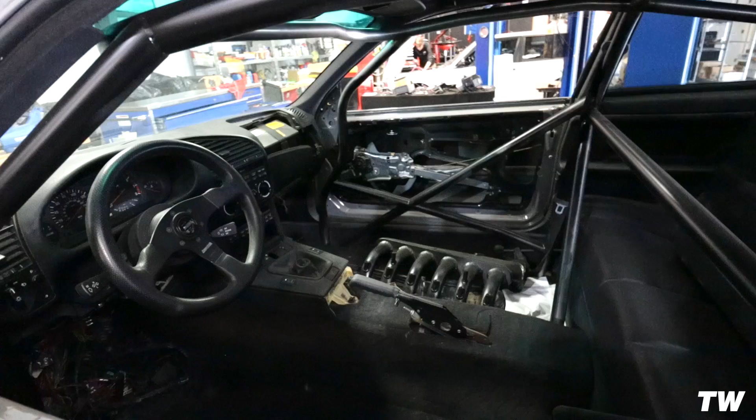In this video, I want to help people decide whether MHD is for them or whether bootmod3 is for them. But like I said, I think you're gonna be able to get to where you wanna be, or very close to it, under both of the platforms. In my opinion, I think bootmod3 is a little more conservative, where I feel like MHD is a little more aggressive when it comes to the tuning. So I think we'll probably see some higher numbers.

Ooh, she do rip through gears though.

Okay, just pulled into the shop. We're gonna get into this process of tuning. I think what's gonna happen today is we are gonna flash in MHD. I'm gonna show you guys that process, kind of explain the differences between MHD and bootmod3 off the bat, and then we're gonna hop over to the dyno and lay down some new numbers.

I'm thinking a couple of maps, probably gonna use the OTS pump map, and then I think we're gonna do some form of E-blend map, might be a custom map. Like I said, John and MHD have been making all the maps for the Supra here at his shop, so he has them all. Basically, if I go pure or do anything like that, I can just literally flash in the map that he has and I'm good to go. Same when it comes to adding in meth and all that stuff.

So a lot of you guys are probably anticipating the meth video. Why haven't I tuned for meth? We're gonna be making some changes to the way that the meth kit is installed on my car. I only have one jet right now, and we're thinking of changing out the lines to stainless steel because we want to be able to tune the car with methanol, but using M1 rather than using the 50/50 boost juice.

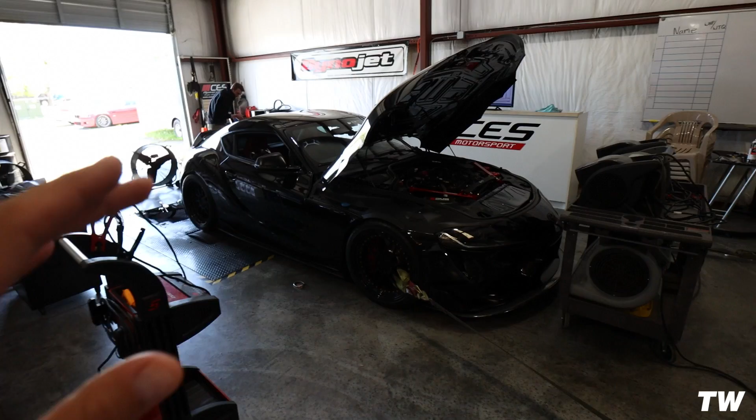All right, we're letting her cool down here a little bit. We're gonna flash in the maps right away, and then I'm gonna show you guys a little bit of the flashing process, kind of what the interface looks like in comparison to bootmod3. And then from there, we will just go directly into dynoing the maps.

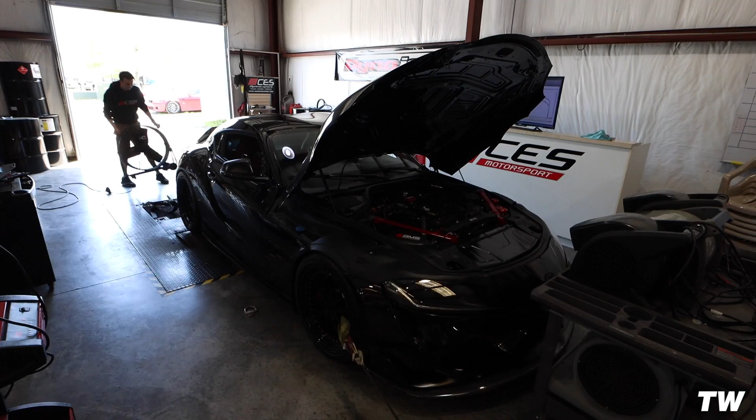So it's going to be 2 maps: the pump map, and then the E30 map. I believe that's what we're doing - it's either E50 or E30. The E30 map is going to be a custom map made by MHD for the Supra, one of the maps that John and MHD worked on together.

Just to be very clear, this isn't a diss to any of my previous tuners. I still think bootmod3 is a great platform. I still think Payne, F80 Paul, Kerry Jordan are all fantastic tuners under bootmod3 if that's what you want to do, or EcuTech, whatever you want to do.

This video is primarily so I can learn about MHD and accurately, unbiasedly give people my opinions when they ask me about both platforms. There really hasn't been that much content comparing MHD and bootmod3 from someone who's actually done it on a Supra. Most people putting out numbers and tune videos just stick to one, which I've done - bootmod3 my whole life. I really want another perspective. I think it's good content, informative for you guys, and brings some value.

Anyways, let's get into the flashing process.

So basically you have your main buttons down here and your back button there. This is obviously the main screen. When you're ready to flash your map, you hit MHD map and it pulls up your maps. Stage 0 is obviously stock, but MHD actually remains installed on the car. Then stage 1 and stage 2 are for the various upgrades you have on the car, and your octane based on what you want to run.

Guys, I want to point out one of the differences I noticed right off the bat: with bootmod3, it actually creates a new map for every single octane and every single stage, so you end up with pages of maps. This makes way more sense to me - just having a little tab here where you select the octane. It's those little details that, in my opinion, make such a big difference when it comes to your user experience.

John brought up a good point. When you are flashing this in, make sure you do not touch anything on the car, even the doors, leave them open. Don't mess with windows, don't mess with anything. And we did go ahead and throw on a battery charger just in case.

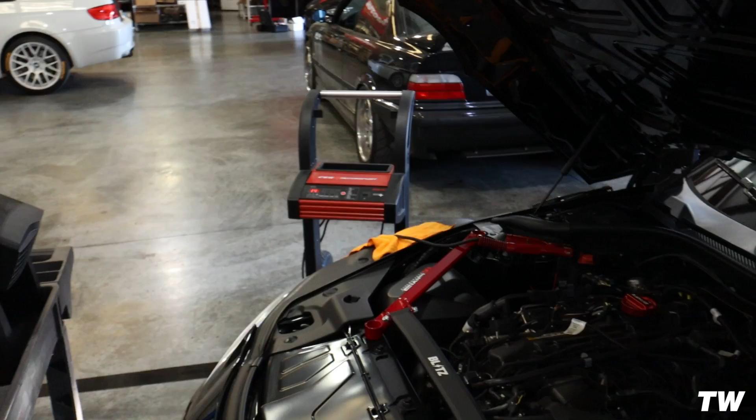You can already see that even though it said 9 to 20 minutes for this, it's less than a minute. Pretty fast. I've seen you flash in other cars before that were already flashed and switching maps, and it's like lightning. At the end of the day, those kind of things actually do make a big difference. When you're constantly switching between maps 2, 3, 4 times per week, that becomes kind of a big deal. Even when you're tuning and doing adjustments, being able to flash quickly to put a new map in and do another dyno test helps tremendously. It used to have to wait 2-3 minutes at a time just to flash in a new update, where now it's seconds.

You had one of the first Supras here in the shop, and you guys were developing maps with MHD. Well, I have to give a little bit of credit to Jake Yamona. He's actually working with the MHD guys. He reached out to us specifically and said, hey, I heard you might be picking up the Supra, we'd like to work with you to start developing some tunes. Of course, we were super happy about that. So when we did get the shop Supra, we immediately brought it to the shop and they began testing on the shop car. We were able to successfully flash the ECU and immediately begin tuning.

That's kind of how it all began, over a year ago with the MHD guys, and I got to know Marshall and Momir, and Fabian at Pure Boost, who does a lot of the custom tuning we do here, and the rest is kind of history. We've been developing ever since. I think some of the OTS stuff they have available out there was developed right here, and hopefully it's been doing well for a lot of other customers and we're continuing to develop more stuff.

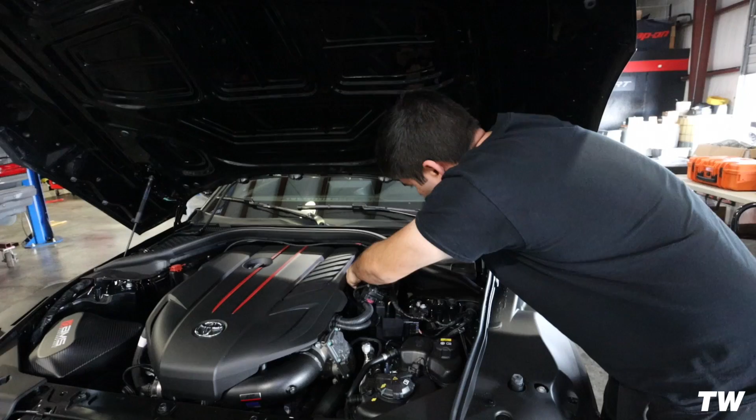I also want to remind you guys, we actually did the unlock here when we initially did bootmod3, and we did it with Active, so they were able to unlock my car because it needed a bench unlock, my Supra. I know there's a lot of Supra guys out there that need bench unlocks. So if you're wondering if you can do a bench unlock for bootmod3 and then use it under MHD, you can. You don't need to relock and then re-unlock, you can just flash right into MHD. It's really that simple. The important thing is, if you do flash, make sure you don't flash back to stock and relock the DME when you do that.

Always leave it unlocked, because if you do the relock, then you'll have to do the bench unlock over again. So definitely do not relock the DME if you do flash back to stock before you switch platforms. I think if you're trying to go to EcuTech though, it's a different story. You'll have to relock and then re-unlock. For me personally, that's why I'm not going to EcuTech. Being able to just flip over to MHD is as easy as coming here and doing it.

And if you guys are interested in unlocking, they have the service. You can just walk in and bring your car here, and they can do that for you here, which is huge. Not a lot of people are doing that in the area. So just make sure it's not after June of 2020. They created a new lock after that, and there still is no unlock for ECUs that are programmed after that date. RIP the majority of A91 owners.

Correct. Unfortunately. Who knows how long it's going to take? I mean, that's like one of the big questions. I'm really surprised that they haven't already cracked it, because people are kind of like freaking out. Like, what am I going to do? I bought this car to tune it. We've had a lot of people asking too, and we're like, we can't do it until that's been unlocked.

That's a huge bummer. We're going to dyno the car and put down the numbers that we have on the 93 Octane Stage 2 MHD OTS map. And then we're going to compare them with the previous numbers we did under bootmod3, so you guys can really see the difference in the graphs and everything. So it should be good. Let's get into it.

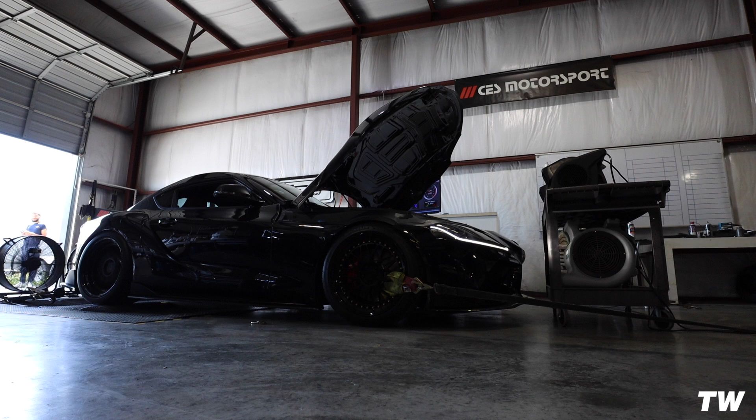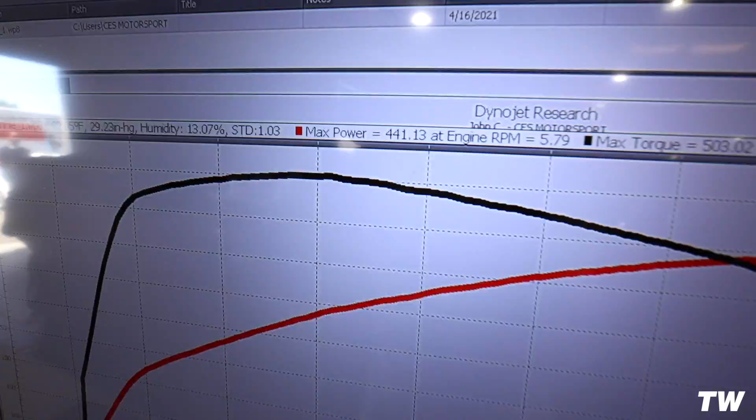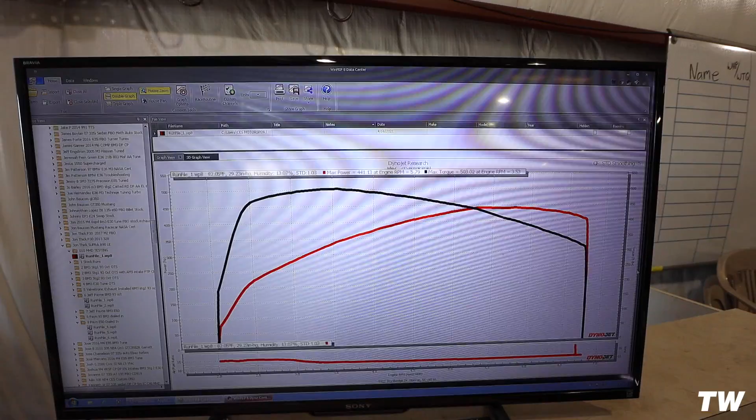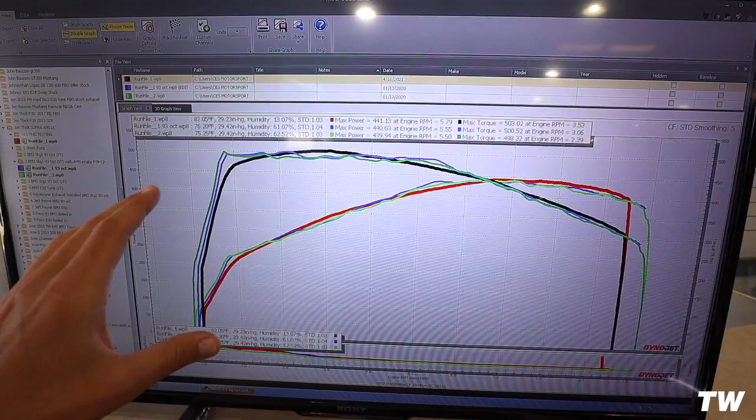All right, so first run with MHD. So here we are already at 441 wheel horsepower, 503 torque, 93 pump, OTS, not a custom tune, just right out of the gate. Not too bad. That's great. All right, so to show you guys what we have here, the black and the red are going to be the MHD numbers. The other colors that you see, the blue and the green, those are bootmod3 OTS numbers. And what I want you guys to pay attention to is how clean the red and the black is compared to the blue and the green.

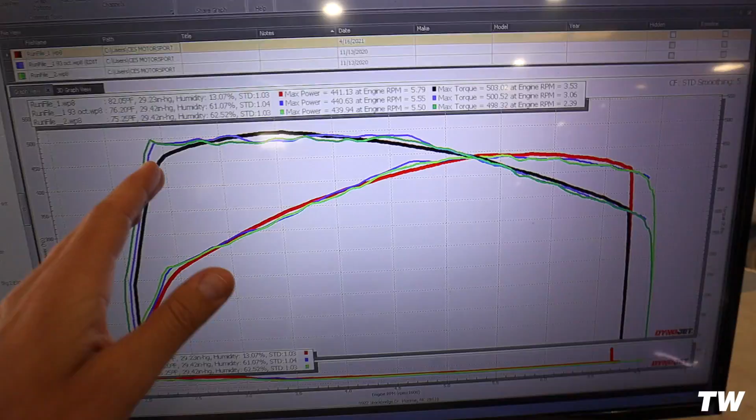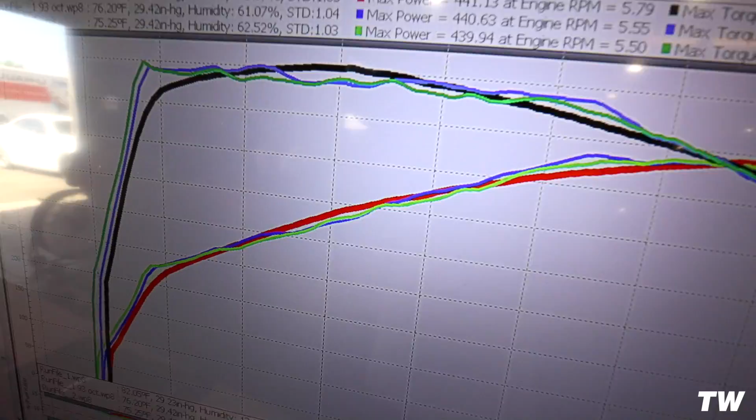So if you guys remember, I had a video where I was talking about how I just can't drive on this bootmod3 OTS tune. You can see it right here. You can literally see what is happening in that tune. It's just squiggly, it's all over the place. That is exactly what I'm feeling when I drive it. So if you look at the MHD, just look at how clean that graph is. It's super smooth. As far as numbers go, first pull, 441, 503, really, really good numbers.

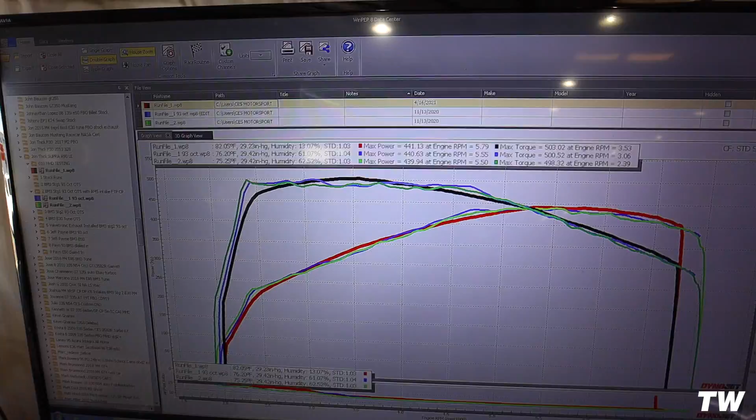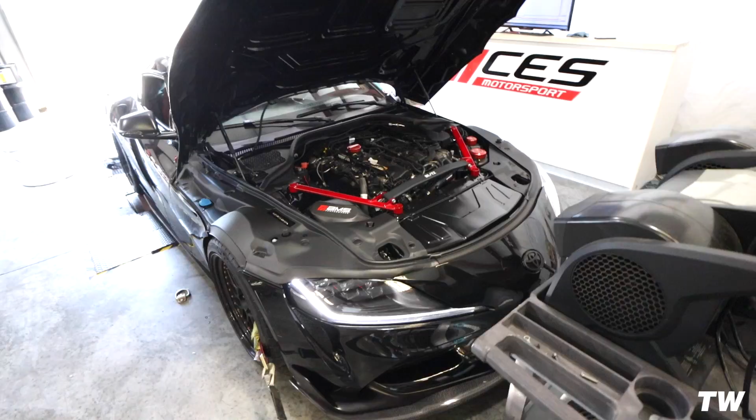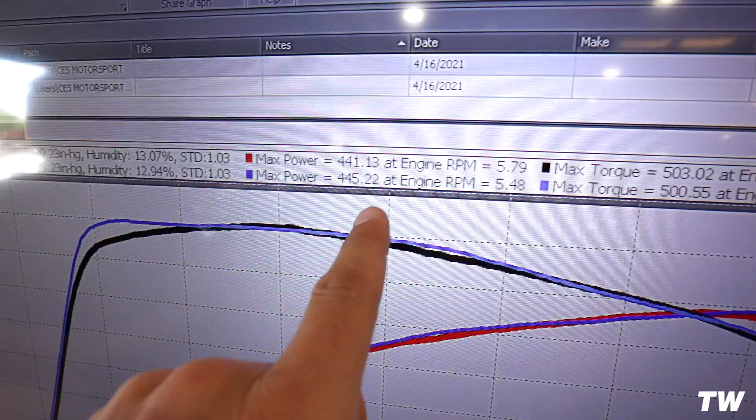I think we're gonna try one more on this map, but as far as talking to John, it seems like that's probably where we're going to end up. So we don't need to go too crazy on that. Yeah, let's go ahead and give it one more run, see where we're at, and then we'll move into E30. Dude, I'm loving how clean these graphs look. Man, look at that. So we got 441 on the first one at 503. The second one gave us 445 at 500. Super consistent. So we know that that's where we need to be.

But just look at how clean these are. We've done a lot of work on these, and MHD definitely has refined these since we've been working on them as well. And these are 82-degree ambient temps also, so it's not like we're 40, 50 degrees out here. This is normal operating temps on the dyno and still getting these, and this was not a cooldown. This was just 2 back-to-back passes on the dyno, and those are the numbers.

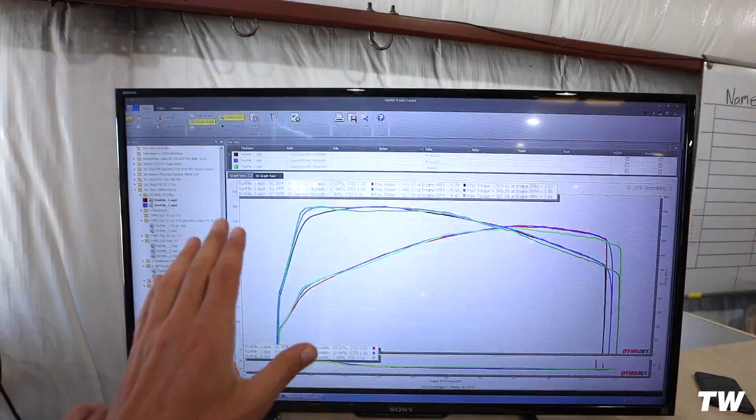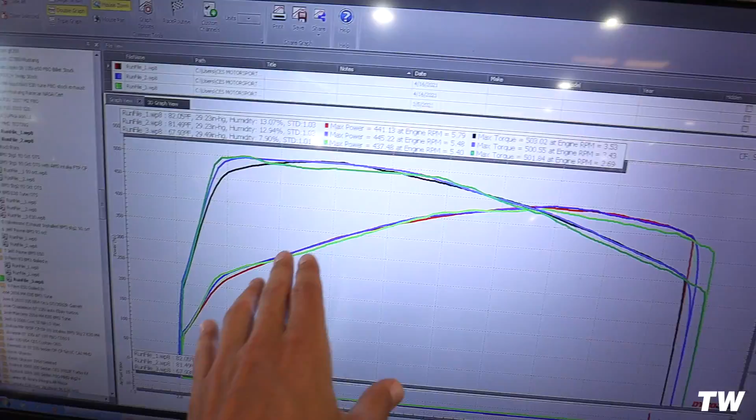Also, let me add this in there because I know you guys are going to ask about this as well. We wanted to throw up the paid tune so we can compare the paid tune. Now, the paid tune made the boost mode platform work much better with these graphs. I mean, you can see clearly it's much cleaner. He's the green, by the way. Paid is green.

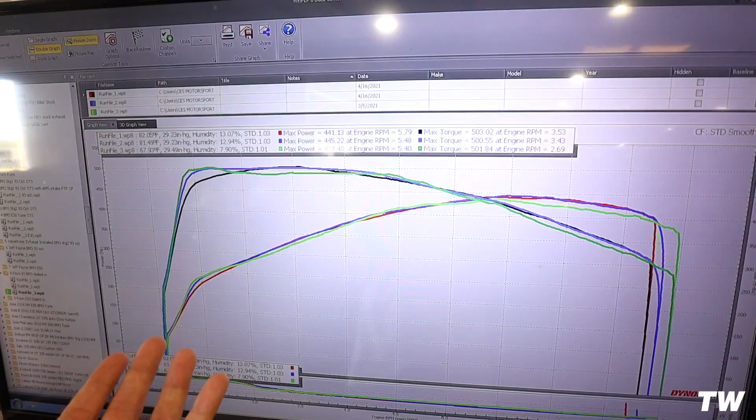As far as numbers go, very consistent, very close to what we had going on with MHD, except, you know, MHD, these are OTS maps. So they did the work on the OTS maps. For me, I had to go custom in order to get this kind of dyno graph with boost modes. And you can also see how you do have more power up top than even the paid tune for

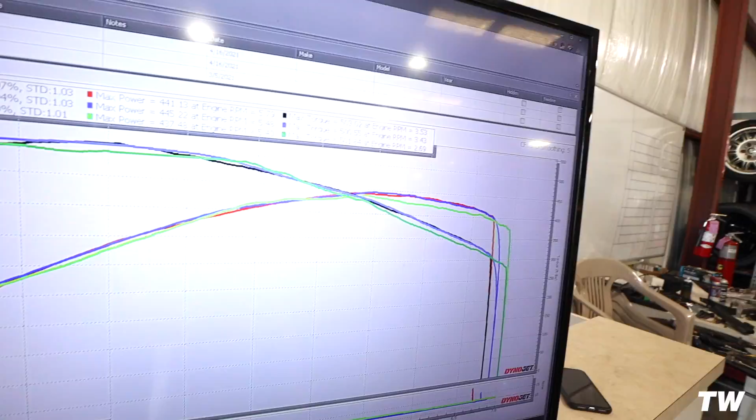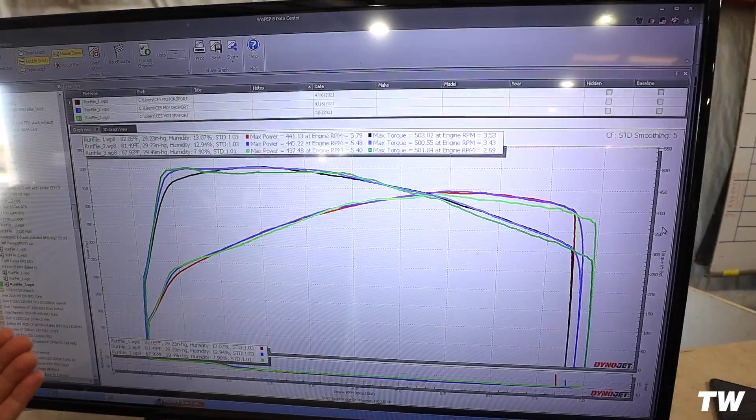this particular setup. But I didn't want to make this video about who's not good and who is good, because that's not the purpose of this video. You can clearly see both of these tunes are fantastic. It's the road to getting to that level, that point. And what I think is important to see here is that one of these is OTS and one's custom. Proof is in the pudding, man.

Yeah, that's pretty impressive. Yeah, it's very impressive. We like to see stuff like that. Stage 2 E30, we're gonna flash it in, mix the fuel, and then do that next, and then we'll move on to an E30 custom map that you guys had made here, and we'll see what that puts down. I'm excited to check it out. I may or may not already know what that puts down, but I'm excited to see it.

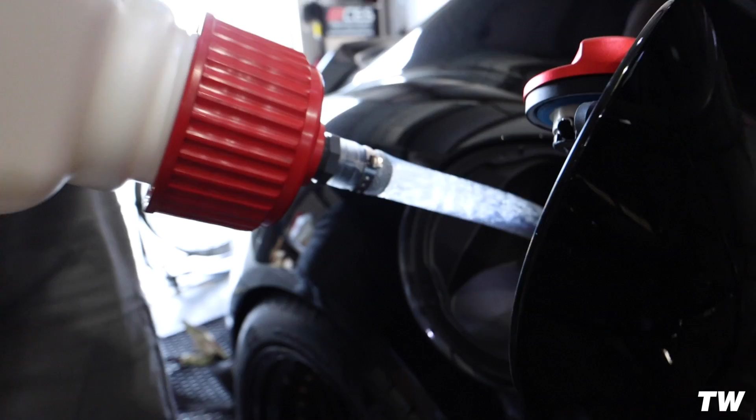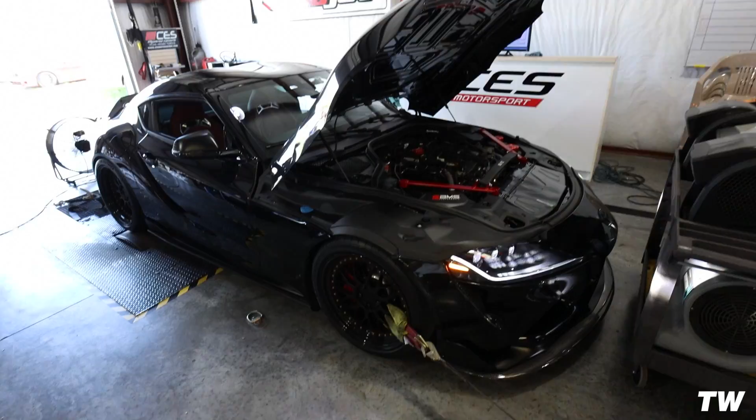All right, so we just added in the E, and we are now at E30, just a little above E30, about E34. Another nice thing to mention is that with MHD, they actually have your fueling levels. You can find those right on there. So that's a big deal when you are mixing fuel, when you don't have an analyzer or a flex fuel kit, which I will have soon, don't have it yet. But if you're doing it manually, it's really nice to know exactly how much fuel is in your car. You can use the Supra app on your phone, but it's not as precise as that.

So this one is going to be a stage 2 OTS E30 run. And then we're going to move into a custom map that was made for this car. And we'll see what that puts down.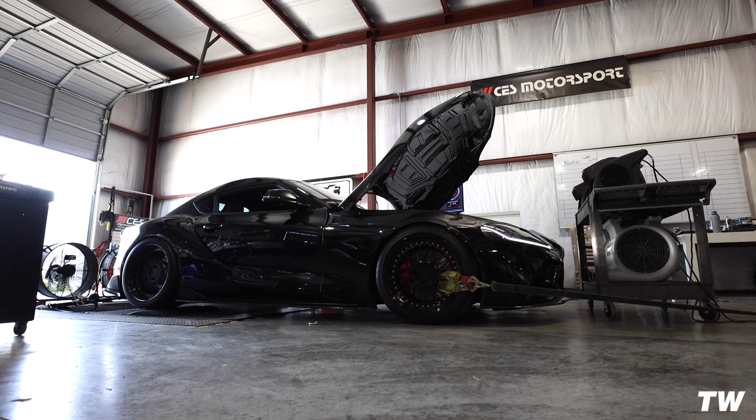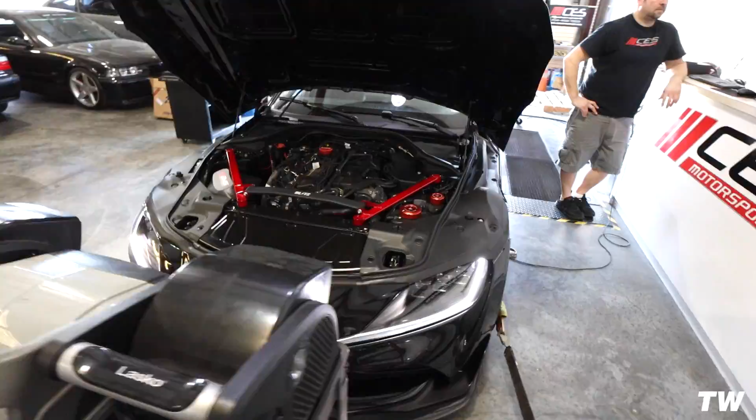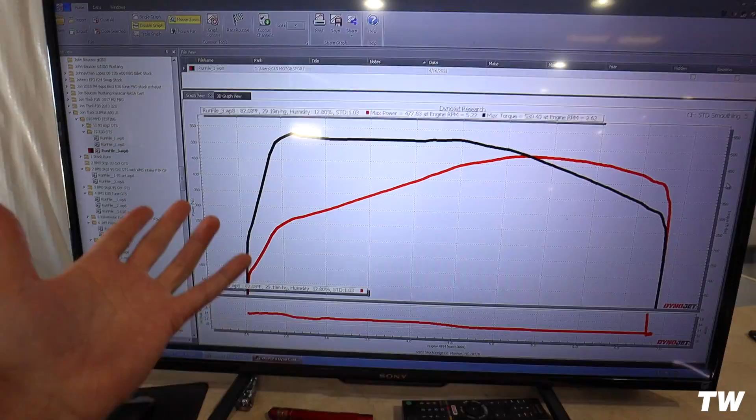Stage 2 E30 OTS, putting us right at 477, 530 torque. We got one more in store. We're gonna actually move on to a custom E30 map, which might make a little bit more. As far as OTS, this is what you can expect if you're running an E30 blend, OTS, MHD, stage 2. That's what we're looking at. So watch how quick this flashes in, you guys. So this is the E30 custom.

There it goes, starting. And done. That's one other thing, it's kind of nice when you're flashing with MHD. It is really, really quick when you're switching between maps. 8 seconds, give or take. Yep. 8 seconds right on time.

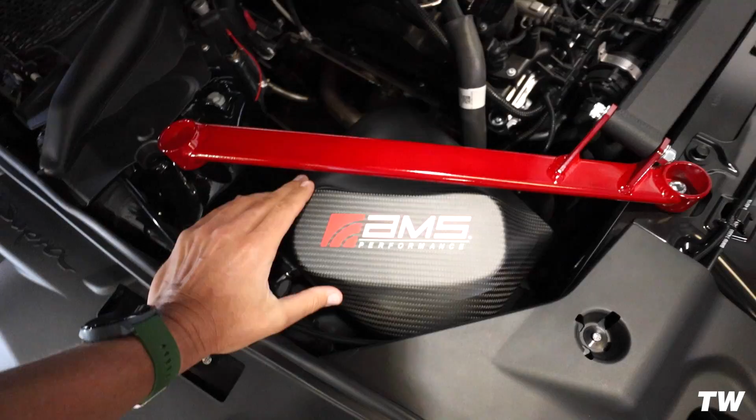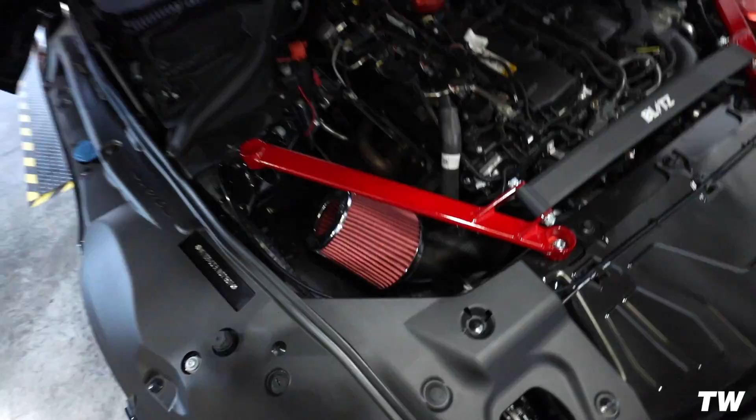Okay, so what are we doing? We've decided to, and I've been thinking about this for a while, we're gonna take this air box out. All right, just like that, new intake's on. We actually just kept the AMS carbon fiber piping, and then I just put on a K&N filter because the filter that came with the AMS one looked super restrictive, so we just ended up going with this one. This enclosure over here is so small and so tight, it just is killing the restriction. So it might look cool, but I don't know. I think I'm just gonna run open-ended.

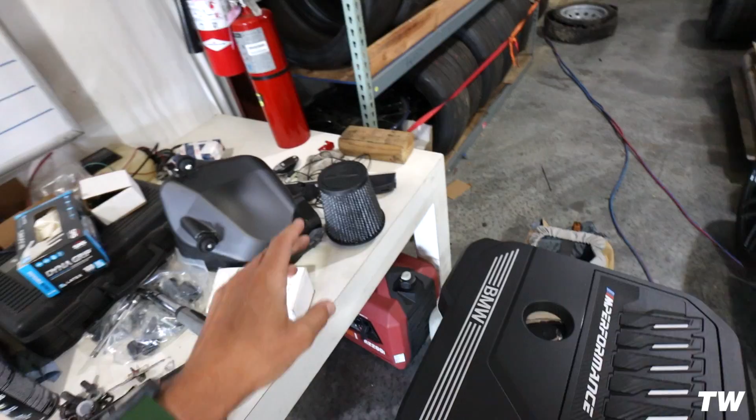And this is the AMS filter. It's got this fucking honeycomb shit on it. I had actually been considering changing up the intake anyway, so I'm just gonna run it like this. Yo, did you guys hear how loud this intake is with the open cone? It is so loud. I like it. I'm running open cone from here on out.

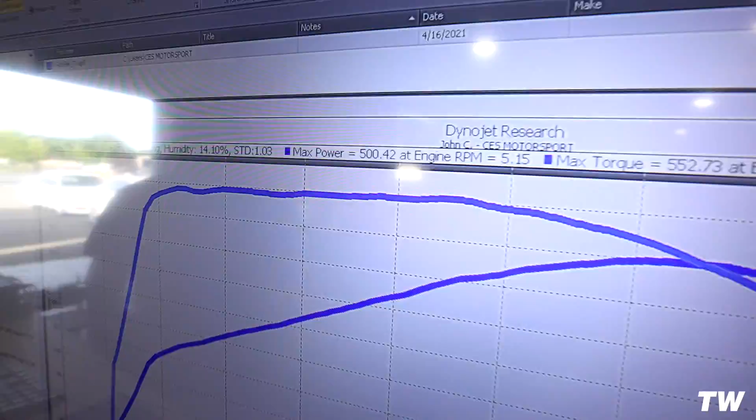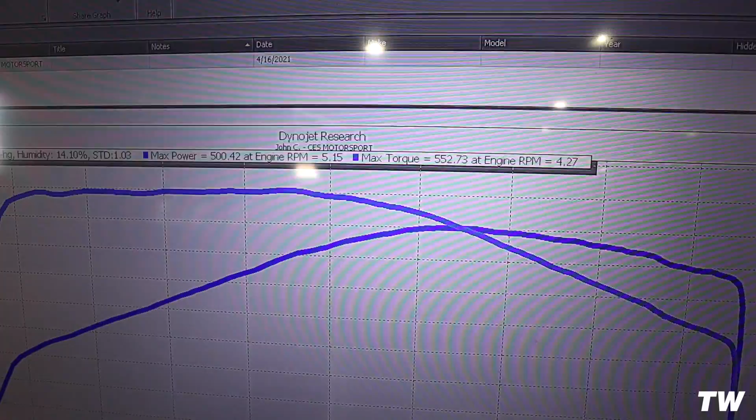All right, boys. We have officially made it into 500 and 552. Look at how clean that graph is too, man. So this is the MHD custom E-blend tune. Really, really happy with these numbers. So this is all stock turbo, 500 wheel horsepower, 552 torque.

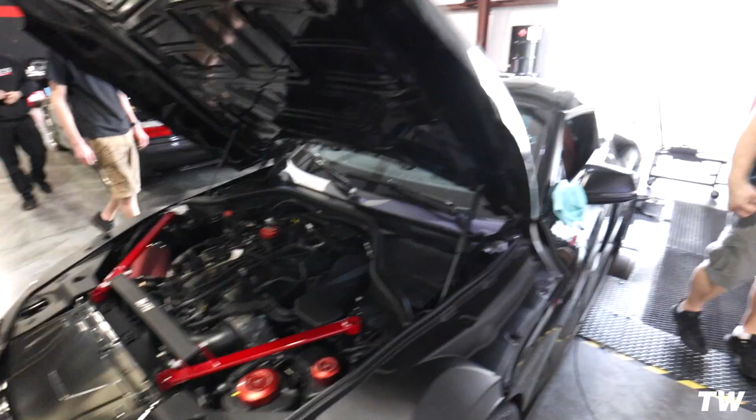Let's see what we got. Rounding it off with the custom E-blend tune, we ended up at 507 and 552. Super clean curve. Graph looks good. Even with the shop temps and the intake temps being in the 90s when we were starting these pulls, still making great power. Really happy to see these numbers.

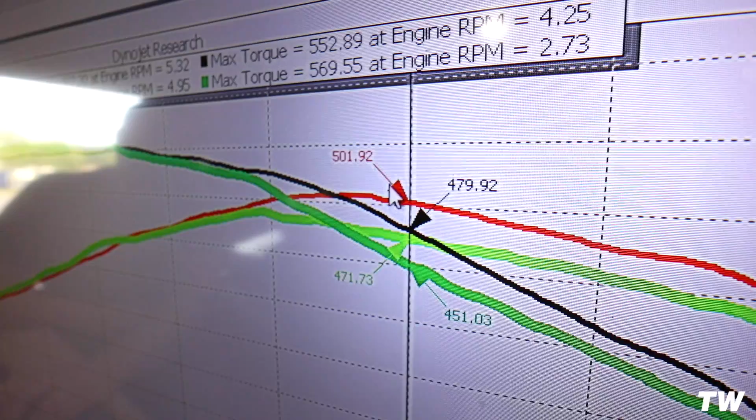All right, so we have a custom tune by Payne, which also looks really good. I mean, if we're being honest, they both look really solid. The top end power is definitely a significant advantage with this particular tune. You're definitely going to feel that a lot more. Let's just show at 5500, for example, where you're at 471 before, you're now at 501 or almost 502. Huge. So that's a pretty significant jump.

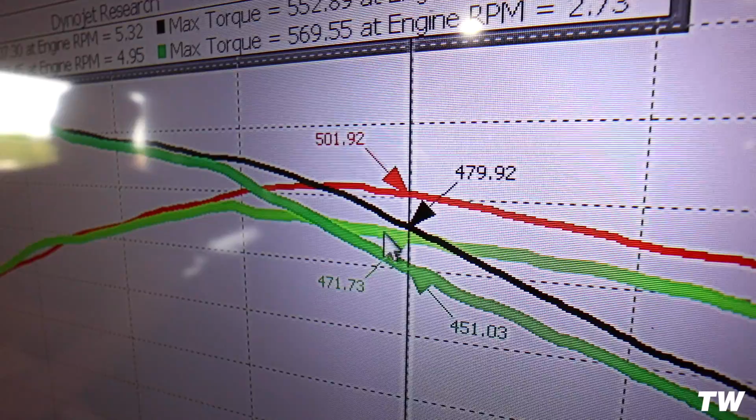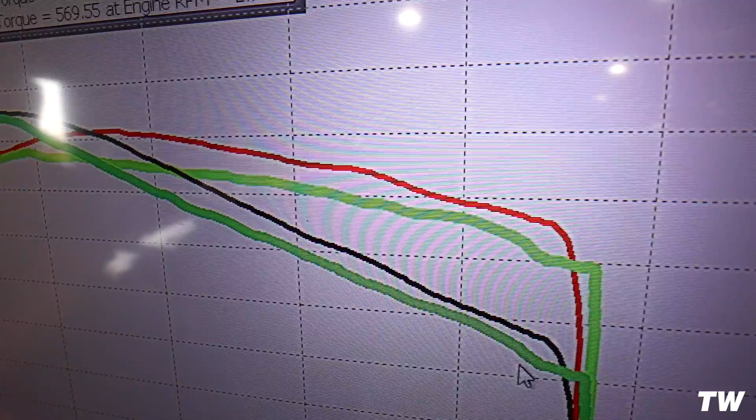What are we, 30 wheel there? And that's at 5,500 RPM? That's at 5,500, as one data point. But all across the board from 5,000 on, you're definitely making a significant amount more power and torque. Yeah. Which you're going to feel on the street. Up top, for sure. And considering the torque is very close in this range, that's not going to be as significant as the top end when you're pulling away.

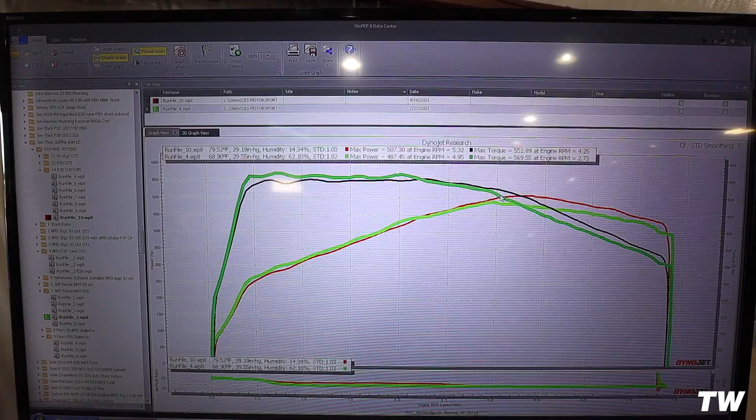So there you guys have it. Some comparative data for you guys when it comes to bootmod3 and MHD, and a little bit about the differences between the two. If I'm being honest, just from the power and the way that it flashes and the way that you use it, I would err on the side of MHD. That's just me.